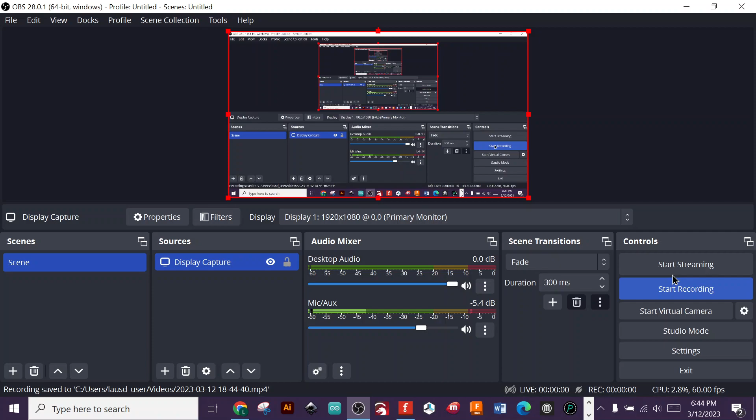All right, motor clip. So we go to SketchUp, go here, decimal millimeters.

Click on that, and then we're going to go up to Untitled. In SketchUp, I want you to name it motor clip and hyphen your name. Not my name, your name.

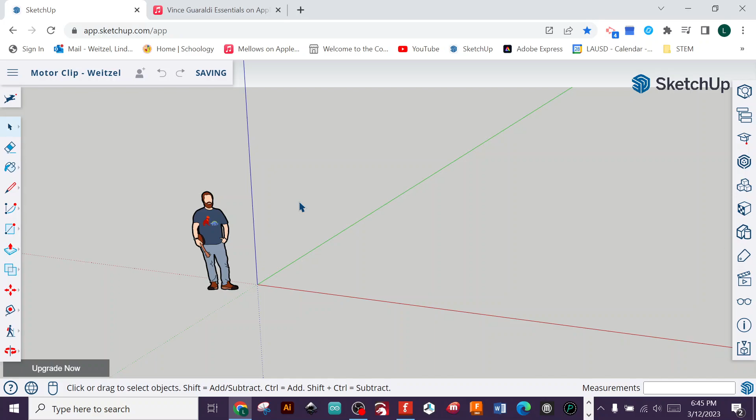So wait until it's saved. Okay, get rid of our friend here. Tap C, circle tool. We click one time here and drag out on the origin.

Now I want you to drag out 10.5 millimeters and hit enter. Now it just seems like it disappeared, but we're going to roll in, hover over it and roll in. And you can see that it's actually there. It's just really small. We want a second one.

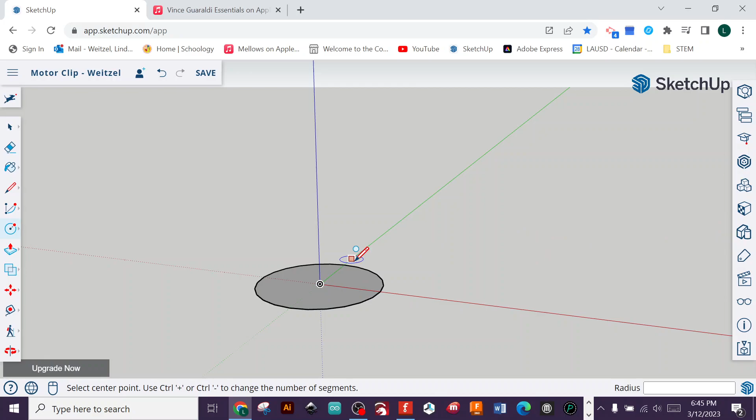Click on the origin, drag out, and then we're going to type in 14.5 and hit enter.

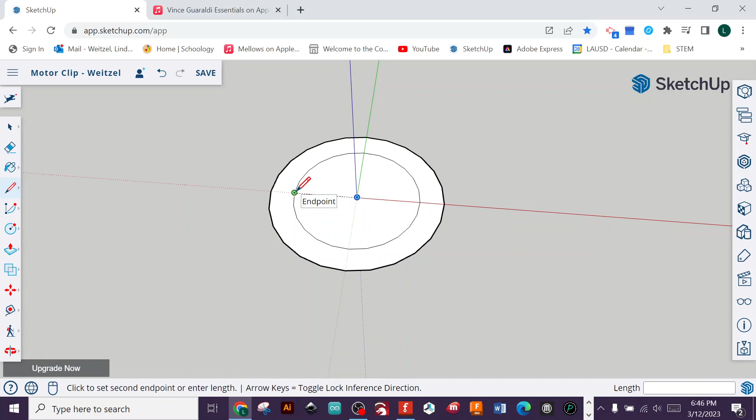Now what we're going to do, kind of rotate to the top. With the line tool, L, click once here. And then we're going to switch to the tape measure tool, which is T.

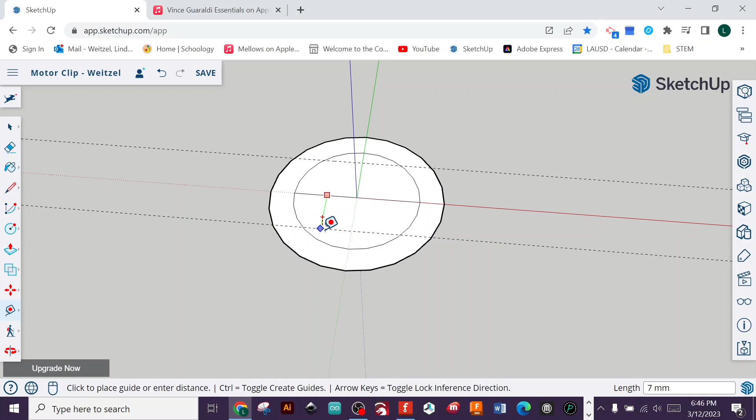You click once here and then gesture your mouse up until it goes to 7 millimeters on the green axis. Click. Do the same thing, click once here, gesture down. I'm not holding the mouse button down. And then click again, 7 millimeters.

I'm going to do that again. Click here, gesture up, and we're going to go 12 millimeters. Click here, gesture down, 12 millimeters.

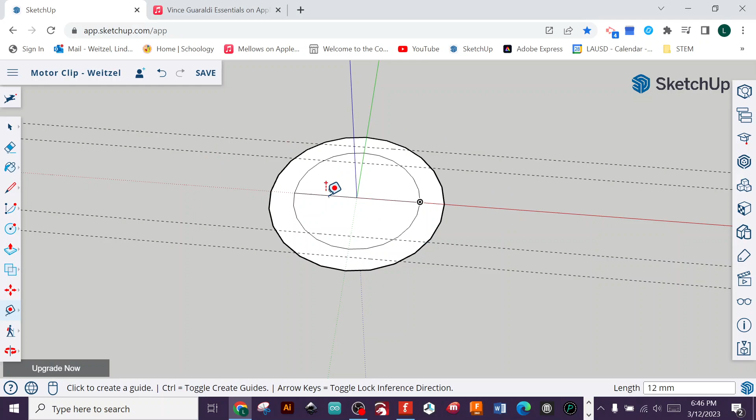At this point, we're going to draw some lines, okay? I want to draw with the line tool. I'm going to go here where it says intersection. I click one time, I'm not holding anything down. Move over, click again.

Go click one time here. Click there. And then click over here, intersection.

So now what I'm going to do is click here on the endpoint, and then on that green axis, I'm going to come over to this line here. Click one time, and then click over here.

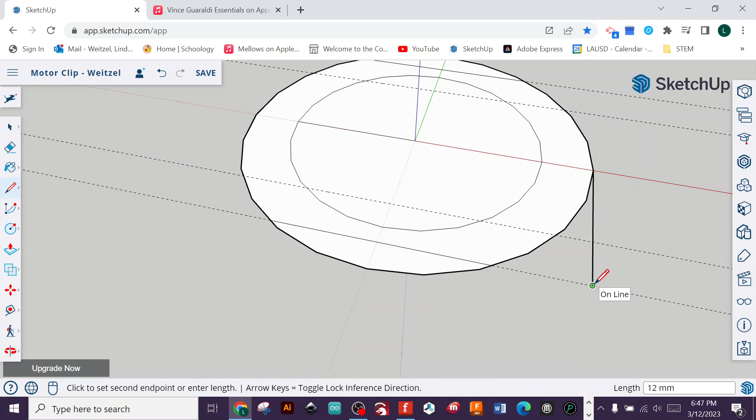So creating that corner. I'm going to do that on every corner I have. So click here, and then over to there.

Okay, we want there. Oh, just kidding.

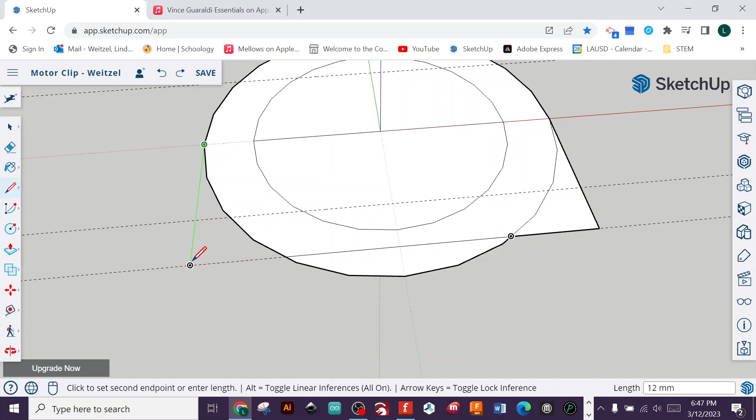So we want to click here, and then on the green axis, sorry about that, start in the center, come out. Click there, and then come out to here. Okay, so I guess it's better to start in the center.

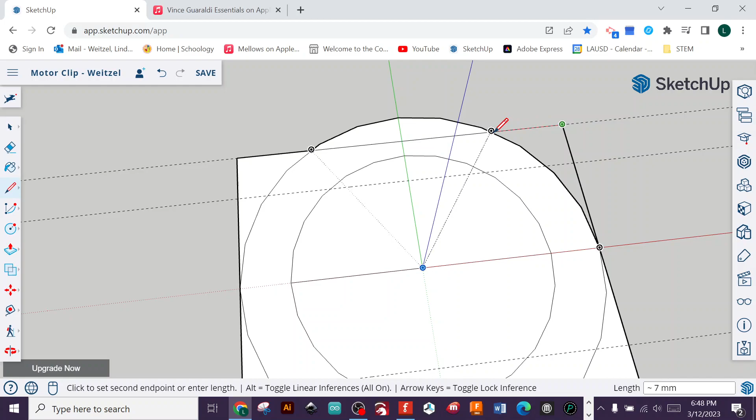So click here, go on the green axis until we hit there, and then over there, and then start here, green axis until I hit here, click, and then come over here like that. Okay, looking pretty good. I think that makes sense.

I want to go here where it says intersection and click and draw all the way up to this edge, and then click here where it says intersection again, click and drag until it goes all the way up to the edge. Okay, now I can start erasing some things.

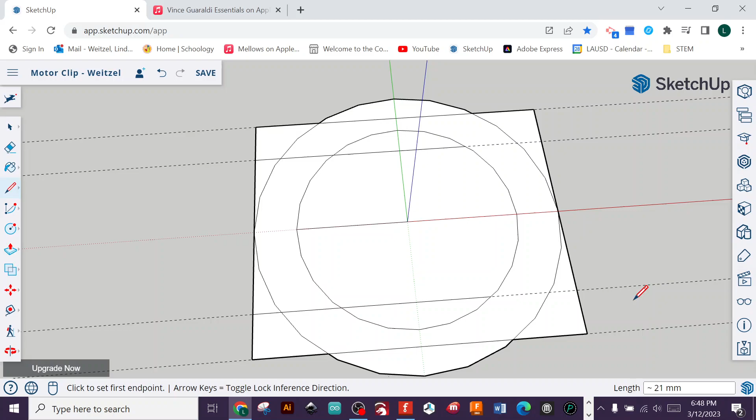Before I do that, tap C, go to the center, click one time and drag out until we hit 6 millimeters. Okay, right there. Click.

L tool again, the line tool. We go to this edge here, click here, and then on the red axis, go all the way up until we hit the edge. Okay, click here all the way up until we hit the edge.

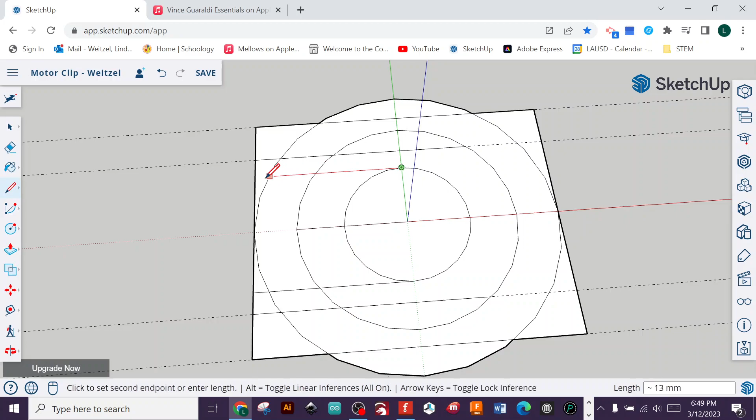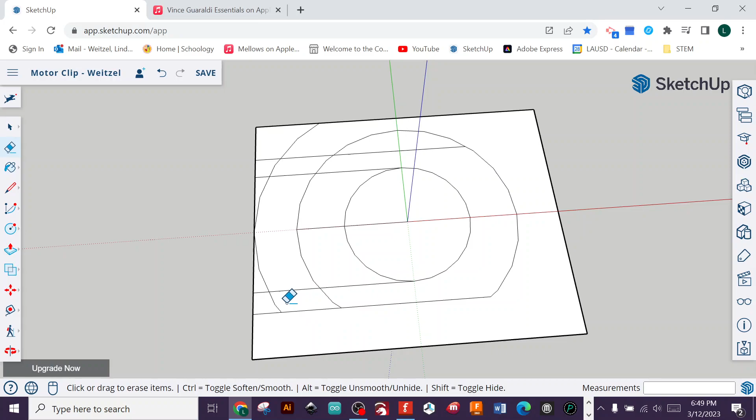So we go E, and we're going to erase that edge. We're going to erase this edge. 1, 2, 3, 4. Erase those. We're going to erase that edge, this guy here, this guy here, this guy, this guy, this guy, two.

Okay, kind of erasing all these pieces until we get something that looks like that. So it's like two U's. We have an outside U like that and an inside U.

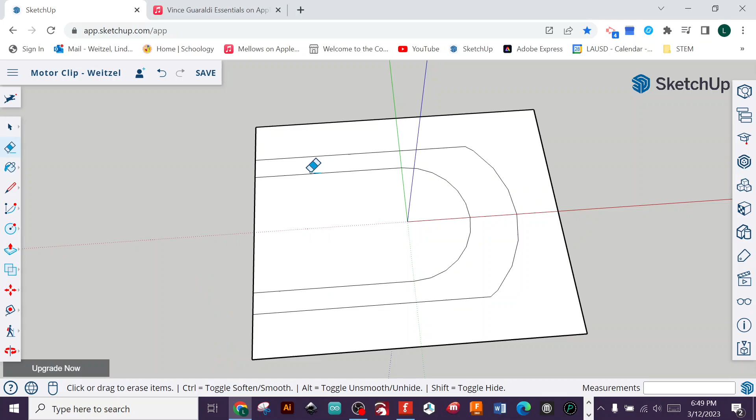Once you've done that, we're going to select that inside and get rid of that. Make sure that you hit save as you go along and hit yes, purge all.

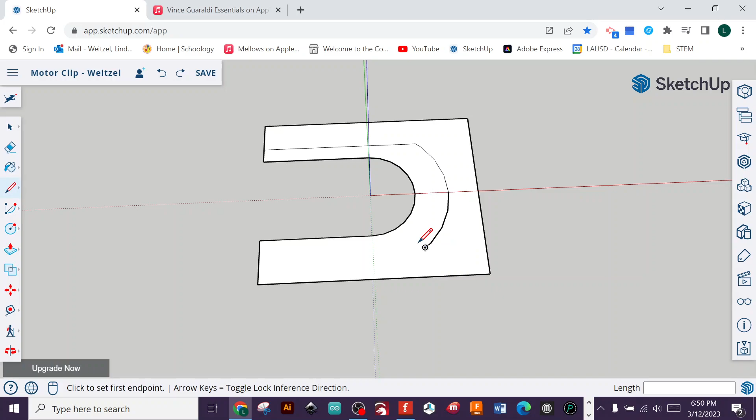Just kidding. Wait, I accidentally deleted that line right there. So I want to, forgive me.

Accidentally deleted that. If you make any mistakes like that, just hit Control Z and that backs it up.

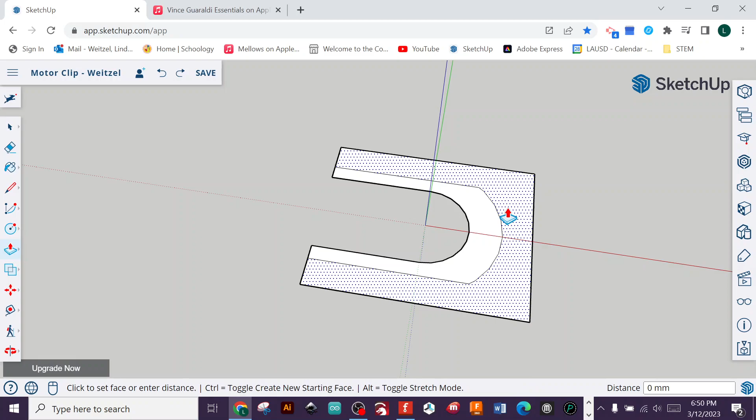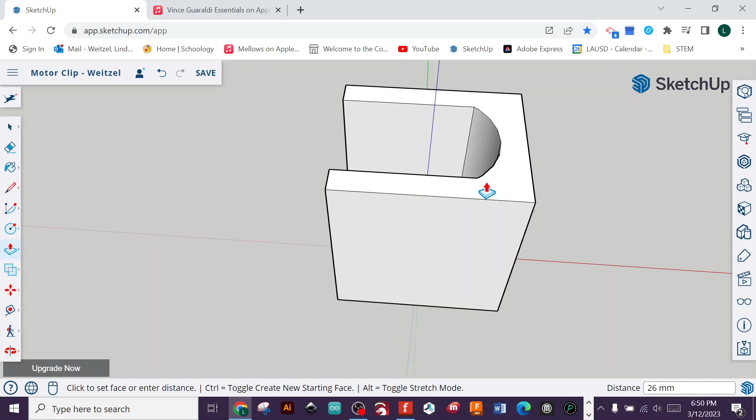Next thing I'm going to do is go P for push pull, hover over this, click one time, gesture up, we're going to go 4 millimeters. Click, click another time, gesture up. You can either go on face or type 4 millimeters and then on face. Once we've done that, click here, gesture up, and I want to type in 26. You can see that down in the distance in the right-hand corner. Hit enter, and make sure you hit save at this point.

I'm going to go L, drag from here to here, and that seals that off, but I want to go to the back, tap the space bar and select this side, and I want to go reverse faces. Then this section in here, I made a little mistake, looks like I deleted something that I didn't mean to.

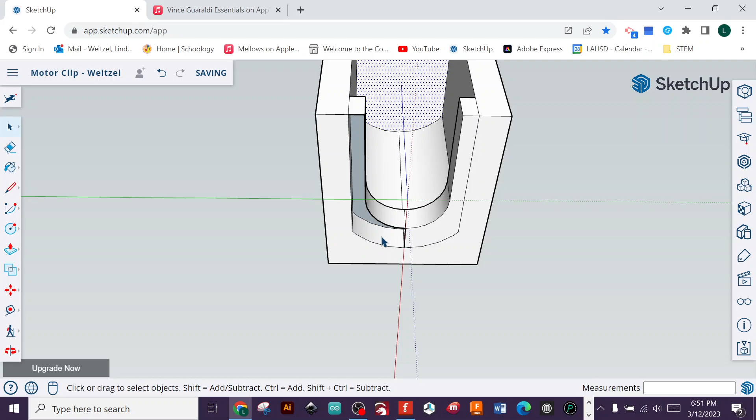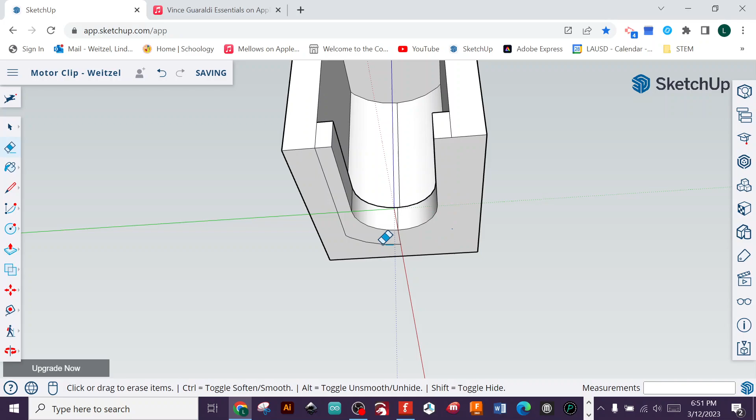So you can go here and then go down like that. Actually, maybe there. Yeah, sometimes just drawing a line, just a random line, will allow you to, and then you can delete it right away. You can get rid of this and this and this and that guy.

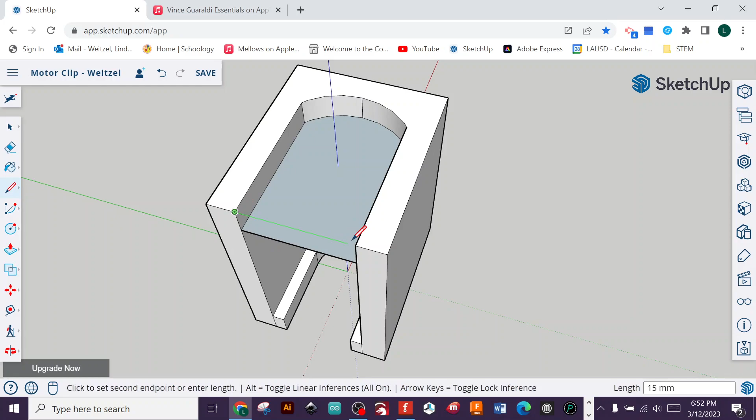So now what I'm going to do is rotate to the top, P for push pull, we're going to go up 4 millimeters. And tap L and go corner to corner here, click once, and then that seals that off. We are almost done with this section.

So I'm going to tap C, and you'll notice that I can't find the center there. That's the center I want. But if you go over here, it kind of, on the edge, it will triangulate and allow me to find it. Now it'll snap to it, which is really convenient. We're going to click once here and drag out, and you want to go to 4 millimeters. You can see that in the lower right corner. If you can't get it to snap there, just type 4.

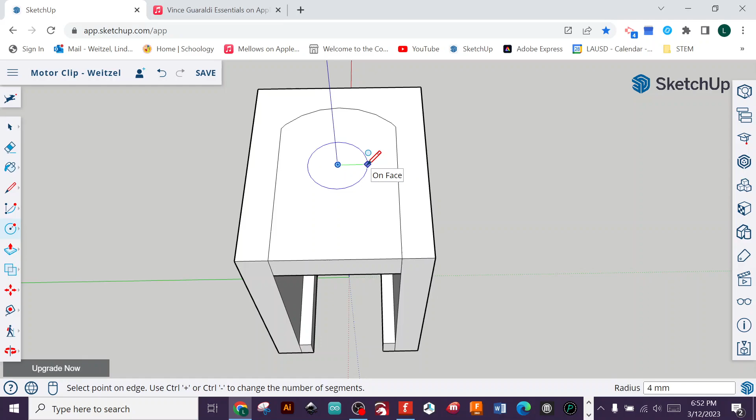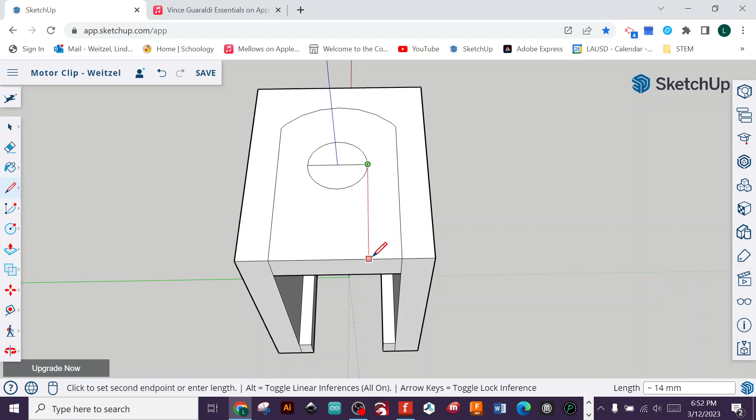We're going to go from the edge here, from the end point. If you want to make sure you have the right one, go from the end point, center, like that, and then we get these edges here. If you're going across the center, you'll be good. We want to come across on the red axis, and then down here, up on the blue axis. Red axis from the end point across to here, and then down there and up there.

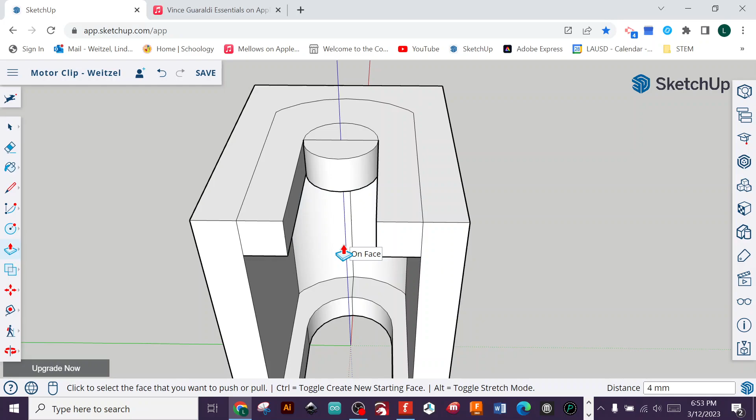So P for push pull, click once here and drag down. Click once here and drag down. Click once here and drag down. So that does the little cutout. That's going to be for the end of the motor right there. And you can see that the motor is just going to get cradled in there.

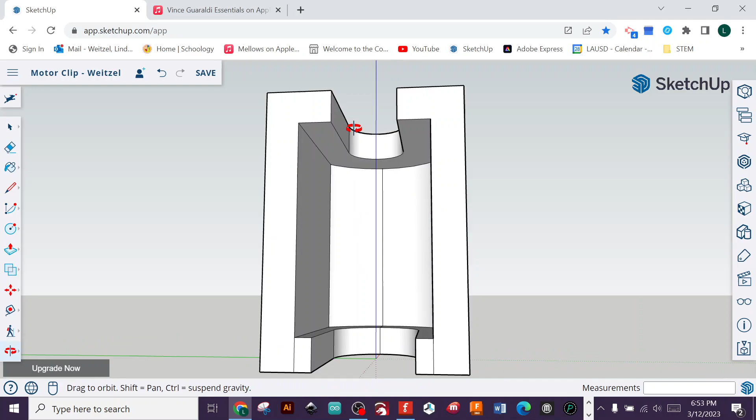I'm using the erase tool right now. Make sure that I didn't erase any geometry on the back side, which is good. This is just cosmetic, it's really not going to affect the print. There's one little thing.

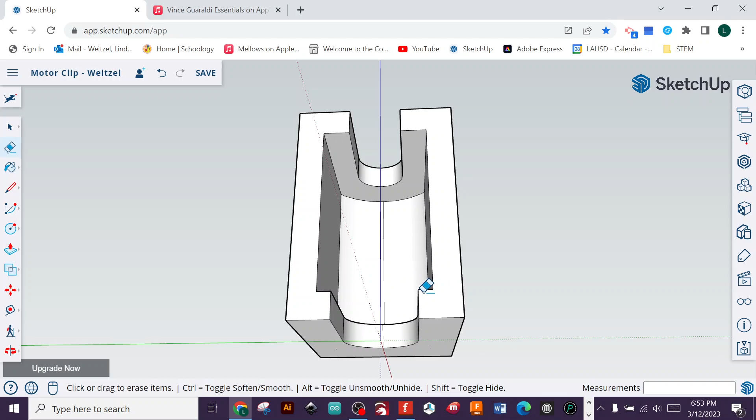We have to make sure we make room for the little motor leads, and those are going to be over here on the right. So here we want to go down, kind of rotate this direction, tap T, and zoom in, and on the edge right here, and we're going to go up 4 millimeters, just like that. Click L, line tool, go intersection to intersection.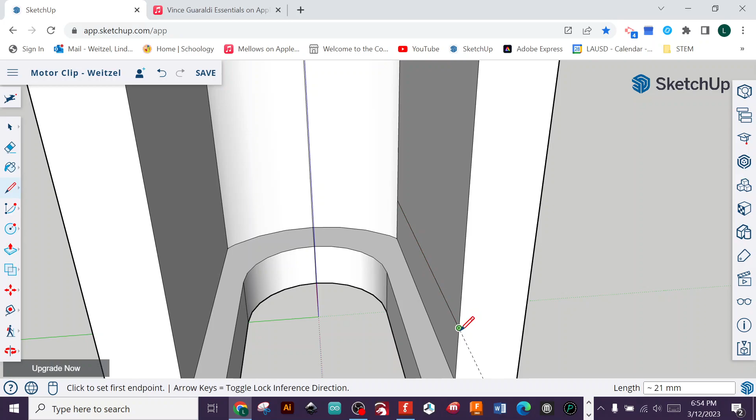And P for push pull, we're going to push this in, nice, 1 and 2 millimeters. And that is officially the end. That leaves room for our wires to come out the side there.

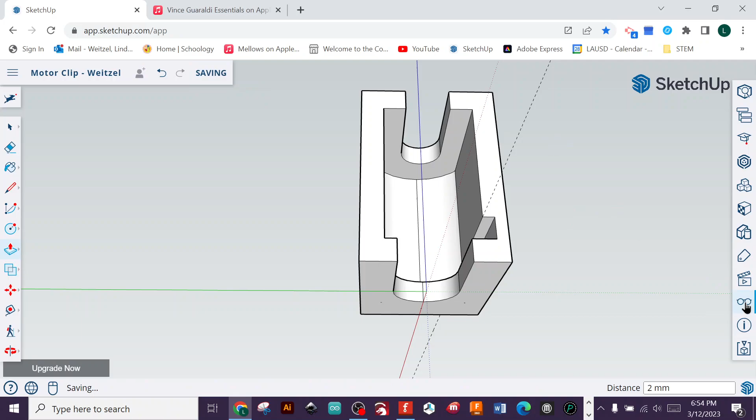All right, so that is the end of part 1. Make sure you save it. And we can go over here to the display and delete all our guides. And that is the beginning of our little motor holder, our motor clip.